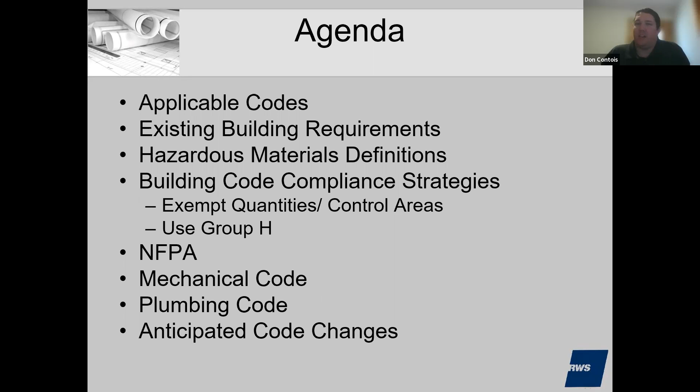And then we did add some slides on the 2021 IBC and NFPA 45. Some of the changes - there's one significant change for higher education in the 2021 IBC, but other than that, most of the changes were relatively detailed or minimal. But we will touch on that because that would be the basis of the 10th edition, and as John just explained, potentially will be in effect in about a little over a year.

So currently, the applicable codes that would apply to a project is obviously the Mass Building Code 780 CMR, 527 CMR 1, which is the Comprehensive Fire Safety Code, which adopts and amends NFPA 1, the Mass Plumbing Code, and then as part of the Building Code we adopt the International Building Code, the International Existing Building Code, the 2015 editions. The Fire Code is referenced by the Building Code specifically, as well as the Mechanical Code.

And then with the Fire Safety Code, 527 CMR 1, which adopts and amends NFPA 1 specifically, it also then references NFPA 30, 45, 55, 70 is the Electrical Code, and then NFPA 704, which is essentially those diamonds that you see on buildings and spaces that have hazardous materials that give the fire department an idea of what's in the room and how hazardous it is.

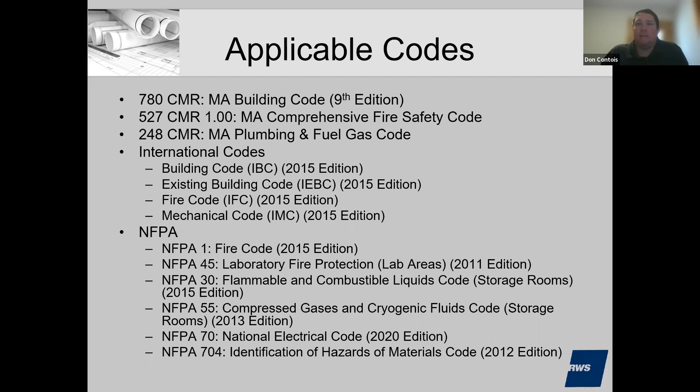So we have some slides on the existing building code and how it applies. This is somewhat general at the beginning. It would apply to any existing building project, but within 780 CMR Chapter 34, they delete the IBC Chapter 34 and replace it with an adoption of the International Existing Building Code. Chapter 34 then has the amendments to that code.

And within that, as part of the Mass amendments, any IEBC provisions generally related to electrical, plumbing, and accessibility are deleted, similar to the rest of the code, where it's replaced by the Mass-specific CMR, such as the Plumbing Code 248 CMR and the Accessibility Code, etc.

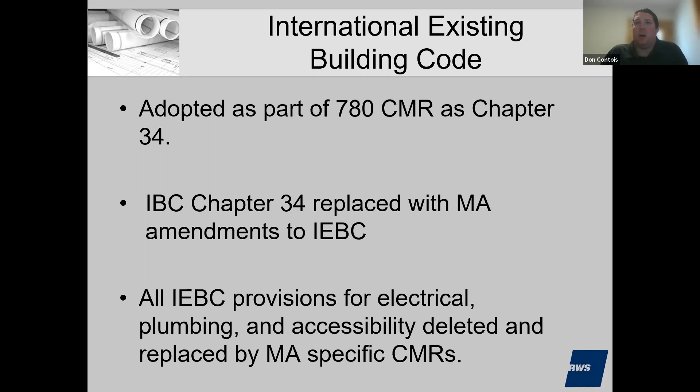So when you're working within an existing building, that's the place you really want to start, is to go to Chapter 34 in the IEBC, and that'll really dictate the scoping that applies to your project based on your renovation.

You certainly don't want to jump into essentially chapters 1 through 33 necessarily right away, unless you're directed to by the existing building code. We see that happen quite a bit, both on the building official side as well as the design side. We see a lot of attempts to either enforce or try to comply with the code for new construction, which may not be necessary based on the scope of the project.

So when you're working within the International Existing Building Code, it does give the designer three potential options of methods to comply with the code.

There's a prescriptive compliance method, which essentially says all your new work, your additions, alterations, or repairs have to comply with new construction, and then elements of the building that aren't altered would generally be allowed to remain. It's a very vague section. It doesn't provide much guidance or many exceptions, so we tend to not use the prescriptive compliance method, except for like a relatively new building where we know it's generally already compliant, and we would make the new construction comply no matter what. So that would be one time we would use that method.

The most common method we've seen used, and we generally use on our projects that we provide consulting on, is the work area method. And those requirements are much more specific, have a lot more different exceptions or different levels of compliance that get triggered for existing buildings.

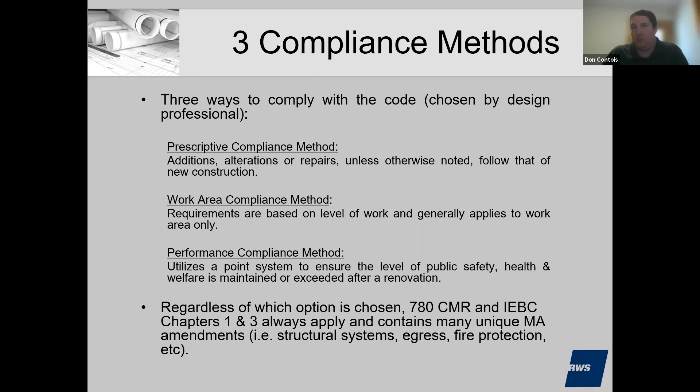That would potentially trigger either compliance or minimum levels of safety within the building, such as minimum lighting and ventilation, minimum egress requirements that a building official could cite at any point for an existing building. Obviously, once you do a renovation project and pull a permit, that may make the building official aware of some non-compliant issues in the existing building that would have to be brought into compliance. Again, those are generally clear-cut life safety or health safety issues such as poor ventilation, lack of proper egress—you only have one means of egress where you need two, or it's blocked, or something of that nature.

Certainly with a lab building, but any renovation project, you're required to submit a building investigation and evaluation report, generally previously referred to as a Chapter 34 report. I think I've heard it both ways a little bit more frequently now, but essentially it's a code report that's given as part of the permit submission, and it details and provides an evaluation of why your project meets the existing building code.

Obviously, it's much more important now that the IEBC is in effect, because it defines which method you chose to utilize to comply, and then it steps through that method to show how the building does comply with the existing building code. So it's a good tool for everybody. It obviously gives the design team the information they need to do the project, but it also gives the building official a lot of information, so they can understand why, for example, if you're not adding a sprinkler system, here's the code section that would have required it, and this is why we didn't reach the trigger, or some other things.

I think we found that most building departments at this point require some form of code report for existing buildings, and certainly for a lab related project, I would say most officials are going to look for that, just so they have some idea of: is it changing use to a high hazard? How are the chemicals being handled? Are we within control areas? Are you doing proper ventilation? Items like that. So I would certainly anticipate the building and fire officials looking for a report of this nature for any existing building that's dealing with labs and hazardous materials.

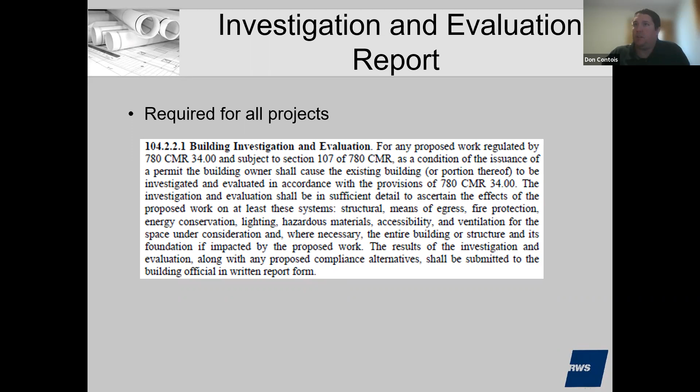So kind of jumping in, we've done a bunch of these existing building lab conversions or just renovations over the last couple of years. Some of the big things we've seen for existing lab buildings that are being renovated: obviously you have to maintain the same level of protection and same level of compliance as the building exists before you do the renovation.

And then when you're doing your new work, this is where that evaluation report comes in—you document, are we increasing the amount of chemical storage? Are we maintaining the control area separation, or was the building one big control area and we're staying below the maximum allowed quantities? Are we changing use to a use group H space, or do we have to add in a high hazard storage room, for example, because the tenant now needs more chemicals than they anticipated two or three years ago? So that's all important stuff that would be documented in that report.

And then the other thing to keep in mind is changes to operation. You weren't dispensing, and now you're dispensing within a room, or you had an open lab that didn't really use any flammable combustibles, and now they're using that for their operations. Do we need to worry about the electrical classification of the equipment within the space, because now we have a potential explosive environment, or do we need to increase ventilation because of the operations that are happening? So those are some of the big points we've seen questioned or needing to be addressed as part of a lab building renovation.

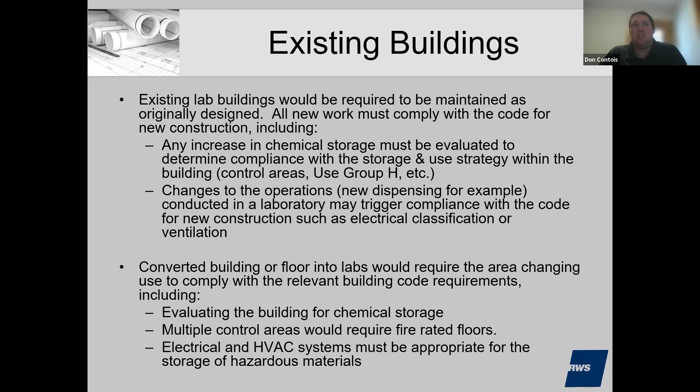How would we do control areas? What kind of tenants are you trying to attract? If it's more bio based and you don't need a lot of chemicals, then maybe it's not a big deal. But other buildings - how hard is it to retrofit fire rated floors, including the supporting construction? So those are all important things to keep in mind as you're looking at existing buildings, either renovating for labs or converting to lab space. And then the other big item, again with any existing building project, but it still applies to lab buildings,

is the Mass Architectural Access Board requirements for renovations of existing buildings. As I'm sure most of you are aware, the MAAB doesn't apply to office areas or employee-only areas. But it would still apply to, say, a multi-tenant building within the landlord space or the building owner space. So the main triggers: if you're spending over $100,000, you need an accessible entrance, toilet room, public phones if you have them - they've kind of gone out - and any public shared toilet rooms.

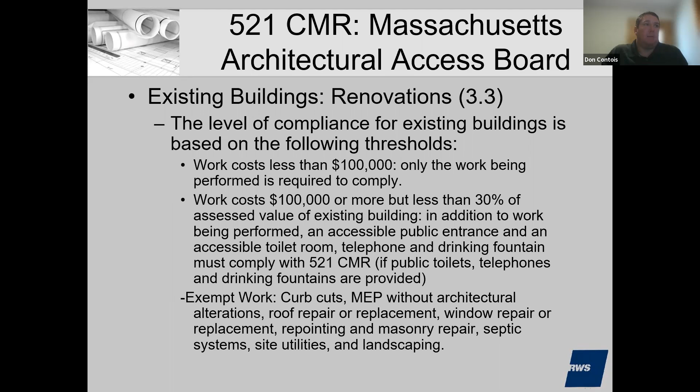And then the big trigger, obviously, if you're in an existing building in Massachusetts, is a 30% trigger, where the project cost exceeds 30% of the assessed building value. Now you've triggered full compliance throughout the building. And we've certainly reached that threshold on most of our lab conversion projects for an existing building, because obviously open office space doesn't work as lab space. So you're doing pretty significant renovations, and if you're doing the entire building, it's not hard to get over 30% of the assessed value in most of these places.

And where we've seen it affect it the most is because 521 CMR would not apply within the tenant space or the office space where it's employee only, but it would apply to the landlord or building owner spaces, such as the main lobby, all the entrances, your exit stairs - so that's handrails, nosings. So any of those common areas, the bathrooms - anything that's shared is essentially considered public space, even though it's only employees of the tenants that are in the building. Once it's shared by multiple tenants, it's landlord or building owner space, and that would fall into the jurisdiction of the Mass Access Board.

And the only other thing to keep in mind as you're doing work even in a building that's employee only, or generally not subject to 521 CMR, is the ADA still always applies as a federal standard. And that generally requires your new work to be accessible. So that would be any bathrooms within your tenant space, any common staff lounges, any kind of common space within the tenant space would have to be accessible if it's new. But individual work areas - your lab benches, your offices, your desks - those do not need to be accessible per the ADA.

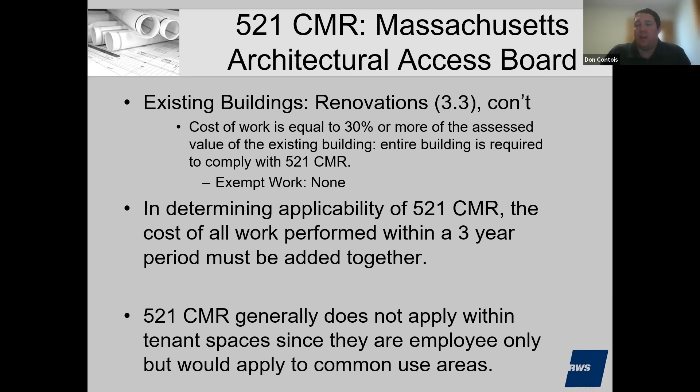So that's, again, kind of a brief overview of some of the stuff we've seen with existing building conversions. So now, I don't know if there are any questions on that. If not, we'll jump into the requirements generally for a lab building. So these would apply to any new lab building, or if you're doing work in an existing building or an existing lab building, these would apply to any areas where you're doing new work, renovating, or changing your chemicals or anything of that nature.

Generally, hazardous materials fall into two main categories: one's a fire safety or fire hazard, and the other is more of a health hazard. The IBC has two different tables split into those two different hazards.

A fire hazard would be the obvious flammable liquids, solids, combustible liquids, explosives, gases, etc. Then you get into more specialized ones: oxidizers, pyrophorics, unstable reactives, water reactives. For health concerns, there's corrosive, highly toxic, and toxic, and they all have different thresholds and different methods of determining classification, based on either flash point or items like that, or corrosive, highly toxic, LD50s, etc.

Those are all defined in Chapter 2 of the IBC in terms of determining what category that hazardous material, what that chemical is classified as. And as you'll see later in the presentation, those classifications will determine how much of that material you can have before you become a high hazard use within the building.

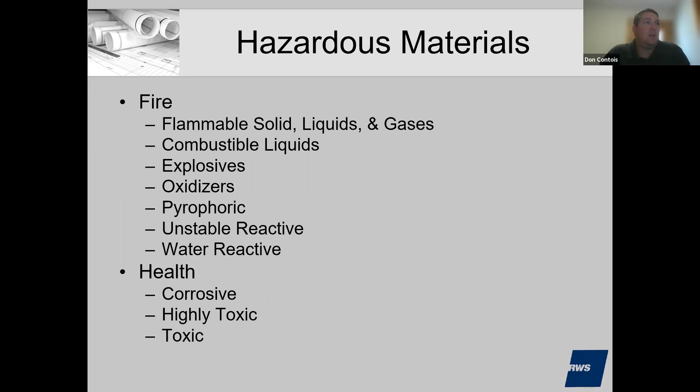As part of the definitions and classification of hazardous materials, in terms of day-to-day usage, or even when you're doing an evaluation of an existing building, the fire department is very interested in what's in these buildings, what's in the spaces, and how do we properly label them.

Both the ICC and NFPA require that some of these spaces or buildings or areas be essentially placarded or provided with signage that follows the NFPA 704 diamond requirements.

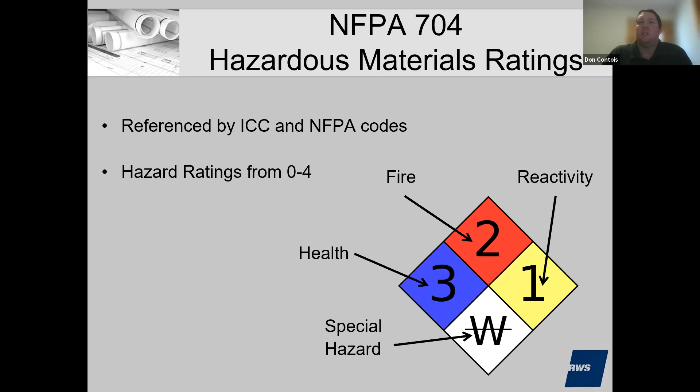As you can see here, a quarter of it is for health, fire, reactivity, and then kind of a special hazard. So within those diamonds, you would essentially put a number in. The higher the number, the more hazardous the item is.

For fire, a rating of 0 does not burn under normal conditions, and as it makes its way up, it gets all the way to a class 1A, highly flammable type material. For health hazard, again, 0 is no hazard, all the way to a health hazard of 4, which could cause death just by being exposed to the chemical.

Essentially the diamond doesn't give you specifically what the hazard is, or what the material is, or even some of these flash points or boiling points or anything of that value, but it gives you an idea of how dangerous the room or the area is. It's more of a guidance than necessarily a way that you would determine the use group classification or anything else with the building code.

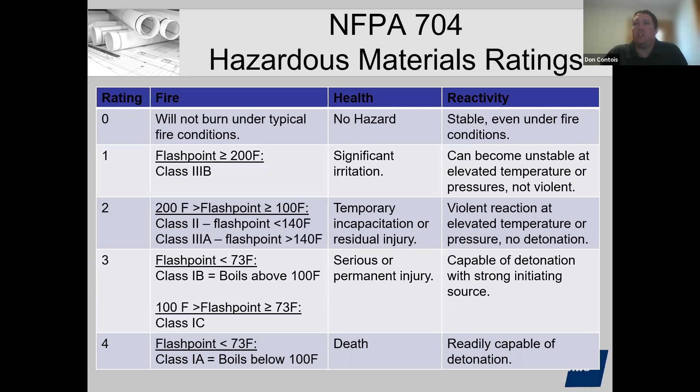When you're evaluating the building, or doing your design for building code compliance, there are three main categories that we typically see: labs, or chemical use type buildings for research purposes and teaching.

Use group B is business use. Essentially you're below the maximum allowed quantities, you're not a high hazard use group, and you may or may not have control areas depending upon the total quantity you're going to store in the building.

Use group B also includes colleges and universities, essentially above the 12th grade educational purposes - that would also be use group B. That's obviously the vast majority of laboratory buildings, and certainly you don't typically have use group H laboratory buildings. You may have portions of the building that are use group H, but most laboratory buildings you'll see are use group B, which is office space with lab space.

In most laboratory buildings, or quite a few anyway, we see a lot of them have a use group H area, or an H3 storage room, which would be flammable combustible liquids over the maximum allowed quantities. These would be limited to generally under 500 square feet, relatively small storage rooms or waste rooms, where you would exceed the control area limits for quantities, but you don't want to necessarily trigger the very stringent use group H requirements throughout your building. So you would do a separated use, and comply with the use group H requirements only in that area, or the egress serving that area.

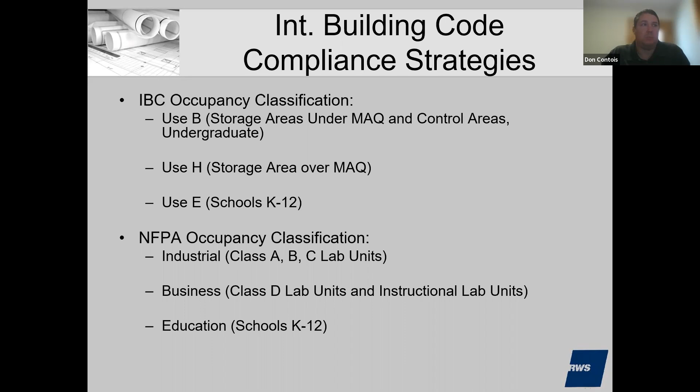Within the building code and NFPA 30, if you look at the Massachusetts amendments in 527 CMR, they amend NFPA 1 to try to match up these maximum allowed quantities between the International Building Code and NFPA 30.

The maximum allowed quantities are essentially a small amount, and the building would remain classified as the primary use group. So if it's just basic office space, it's use group B, and the entire building would be use group B.

If you have more than that small amount below the maximum allowed quantity throughout the building, you can divide your building up into control areas. Your building would still stay the primary use group, or use group B, but it would have to have 2-hour floors generally, and 1-hour or 2-hour walls depending on how tall the building is and where the control area is located. When you divide your building into these control areas, each control area is allowed a certain percentage of the maximum allowed quantity.

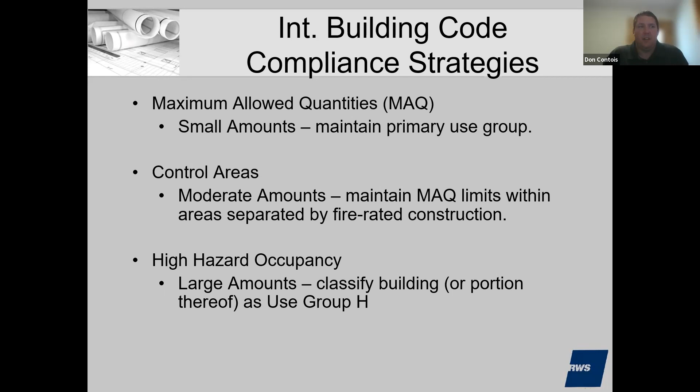If your building exceeds 100% throughout, when you get to the control areas you can have more of them, and each can have a certain amount based on its location. Where you exceed those maximum allowed quantities, you would have a high hazard, or use group H, occupancy. Typically you don't see a building classified that way because it's pretty stringent, and the construction type would have to be much more robust than if you just called it a business building. So normally we'd see a storage room or storage area carved out as use group H, and only that area would comply with the more stringent requirements.

When we talk about maximum allowed quantities, this table is just a partial excerpt from the IBC. The full table has a lot more material classifications, and there's another table for health hazard limits. For flammable liquids, even class 1 B and C, you're allowed up to 120 gallons, and you can increase that by 100% if the building's fully sprinklered. So these maximum allowed quantities are a decent amount depending on the type of chemical. Obviously the more hazardous, like an unstable reactive class 3 or class 2, at 50 gallons or 50 pounds, or 50 pounds in a sprinklered building, you can go up to 100.

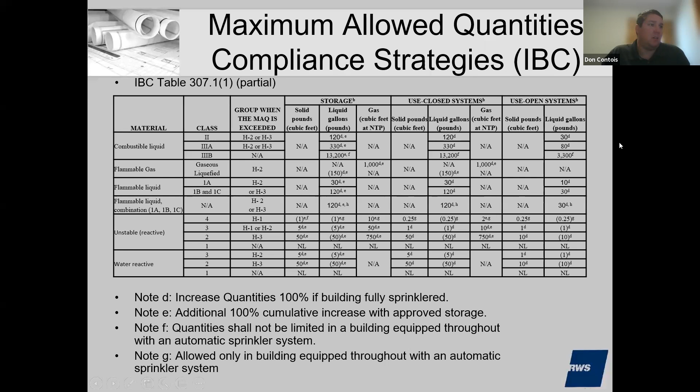So it does get limited based on the classification. As you'll see in the next slide on control areas, those percentages only give you a portion of those quantities as you go up in the building, so those previous maximum allowed quantities you can essentially divide.

Here's an example of what the code allows for maximum allowed quantities and control areas within your building. For a 5-story building, all your floors would need to be 2-hour rated. You could divide it up into separate control areas, and within each floor, for example floor 1, you can have 4 control areas each with 100%. So you can see how those maximum allowed quantities can add up. Even if it's 100 gallons of class 1, with 4 different control areas, you could put that 100 gallons in each one. Then you could put 75 gallons in each of the floor 2 control areas. You can see how a lab building can have quite a bit of hazardous materials without becoming a use group H occupancy.

As you can see in the 4th column, it talks about the wall ratings. Up to the 3rd floor, you can have 1-hour separations for your walls. Once you're on the 4th floor and above, you need 2-hour fire barriers to separate control areas on that floor. If you're doing a lab building, you want to keep the chemicals and chemistry-heavy lab tenants or lab spaces lower in the building, because the maximum allowed quantity percentages are much higher there.

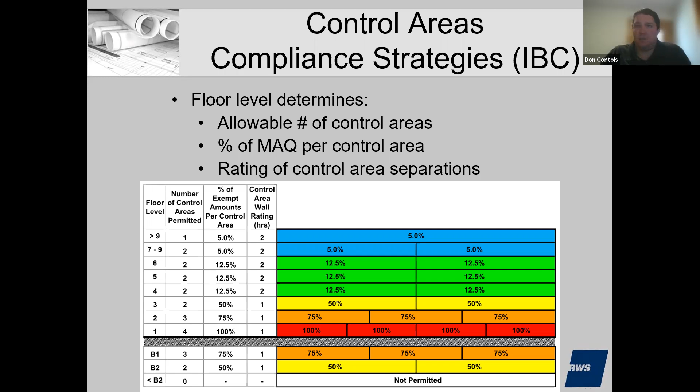As you work up through the building, if you're only allowed 100 gallons total, for example, you'd only be allowed 5 gallons on the 9th floor. So you're pretty limited once you get up in the building. But the lower levels can have quite a bit of materials and quantity.

This is one of the more critical things to investigate as you're evaluating whether it's feasible to convert your building to a lab building. The general requirement is you need 2-hour rated floors to have multiple control areas within the building. The only exception is essentially a 1-hour fire rated structure, only 3 stories in height, that's fully sprinklered—the 1-hour structure would be sufficient. Other than that, you'd need the 2-hour floors.

On a couple projects where the existing building didn't have fire rated floors, and it would be cost prohibitive and difficult to retrofit them, we essentially created boxes. In one project, we did it in the basement, so it's on grade and we don't have to worry about rating the floors. We just do a 2-hour cover cap or ceiling, supported by 2-hour perimeter walls around the control area. We didn't have to touch the existing building construction at all—since the walls were supporting the 2-hour fire rated horizontal assembly, the new walls and assembly were fire rated, and we could put a control area on the lower level without affecting the whole building.

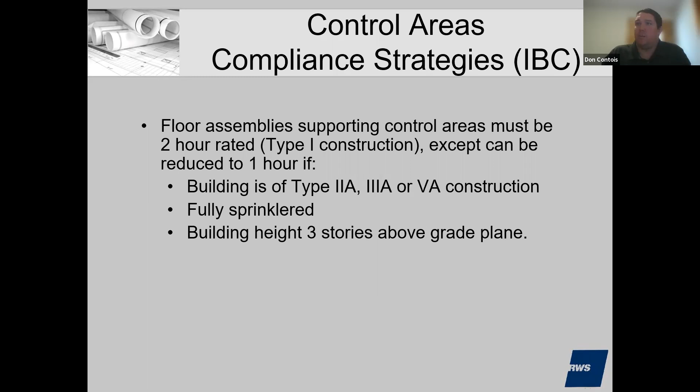So again, back to the liquid storage room. What we find is that most of these use group H spaces, or these large storage rooms of larger quantities, would be under 500 square feet. That way you can have a 2-hour rating, and that essentially corresponds and meets the IBC. So in most cases we find that our use group H, or our high hazard type uses, are H3, which are flammable liquids, systems that are under 15 psi.

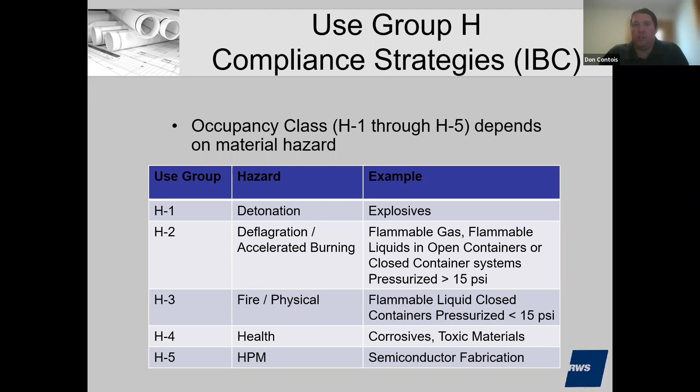So essentially you don't have pressurized hazardous materials. And again, there are exceptions in the building code that make that 500 square feet pretty important, because the building code has requirements that these rooms be located in certain portions of the building, or away from lot lines, or along the perimeter of the building. So it's important to know, one, what use group classification are you in, and then how big is that room going to be.

So for example, if you have a high hazard room, usually it's a use group B building. I mean, you could have it in a larger use group E school system, but normally you find it in use group B. So H3 actually only requires a 1-hour fire rated separation. H2 is the pressurized chemical. So if you had a system where say you had a storage tank of a flammable liquid and it was piped and pumped into an adjacent lab area at a higher pressure, that potentially would trigger use group H2, which would be a 2-hour room. But even with that, you're most likely need to be 2 hours anyway if you're over 150 square feet per NFPA 30. So you've got to work together between the two codes.

I would say hazardous materials are one of the more frustrating parts of the codes, because there are two, three, maybe even four or five different codes that all impact how you design it. Being the building code, obviously, the International Fire Code, which we're referenced by the building code. Then you have NFPA 1, which NFPA 30 and 45 are adopted, depending on how you're storing your chemicals and how you divide up your building. And then obviously there's the mechanical code that kicks in as well. So it does get quite complicated, and you have to obviously meet all the codes.

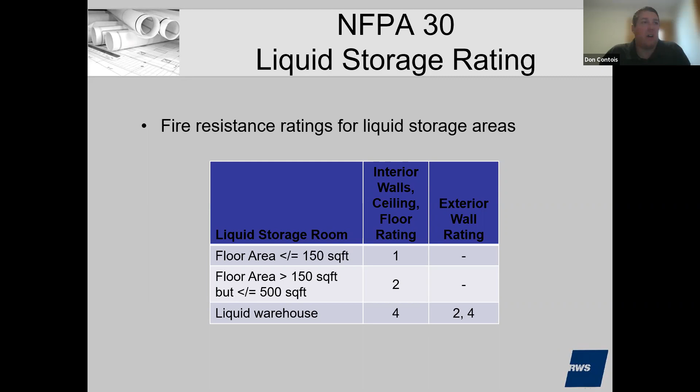So as I was saying, depending on your use group classification in the building code, there are minimum separation distances for walls that enclose that occupancy. For H3, there is no requirement, again, which is the more common use group classification for these type of hazardous or chemical storage rooms in a building that has control areas. If you do have that use group H2, where it's a pressurized system or flammable gases, if the aggregate area exceeds 1,000 square feet, now we're looking at a 4-hour rated room.

You have to be 30 feet from a lot line, which again, a lot of these buildings are on larger parcels, but obviously in downtown Boston, you see plenty of these lab buildings down in the seaport that are high-rise lab buildings that essentially take up the full lot, or may not have the full 30 feet.

And then the other criteria, and this is where the 500 square feet also comes in pretty importantly, is if you exceed that 500 square feet, you also need to be along the perimeter of the building. So 25% of your room needs to be along, or that use needs to be along the perimeter of the building.

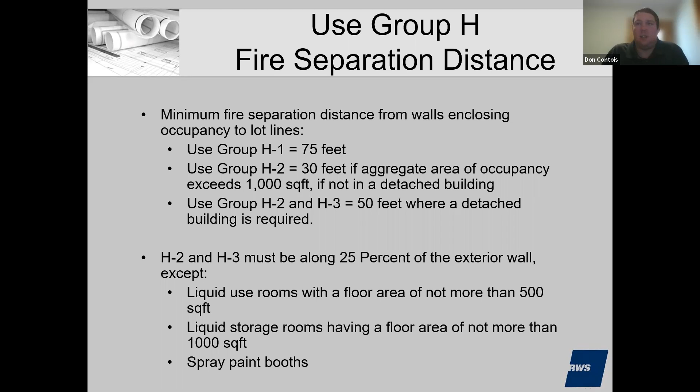So kind of now jumping more into specific systems and means of protection within these rooms. The code requires... go ahead. Don, yes, one more question. Sure. On those storage rooms, you didn't make any mention of the possibility of use of blowout panels.

Yeah, I have a couple slides on the explosion control later on. Yeah, so that's also part of the reason for it to be on the perimeter, but there are other systems out there that you can use to essentially prevent the explosion, or other means. So when you have it internal to the building, it's only certain chemicals and certain hazardous materials that actually require the explosion control. So that's why, again, it being located on the perimeter of the building is not as important necessarily. But we'll touch on the explosion in a little bit.

So as part of the leak detection requirements, a lot of these requirements that have the enhanced protection are generally required in these use group H or liquid storage room spaces. So when you look at it, a lot of them will say where the storage is over the maximum allowed quantities, or where the containers are over the maximum allowed quantities. So if you're below the maximum allowed quantities, most of these requirements don't apply, which is again why a lot of these lab buildings are using control areas or trying to limit the quantities.

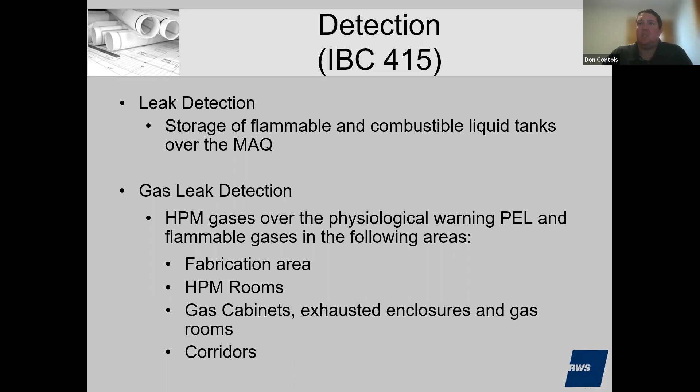So that's kind of the building code requirements. And then there's the international fire code requirements that require leak detection, again where you have health hazards - class 3 or 4 flammability, class 4 - the more higher hazard materials. The international fire code requires some kind of leak detection where you have pressurized systems. And underground flammable combustible liquid storage tanks would have to have some leak detection, generally for environmental purposes rather than actual fire hazard purposes.

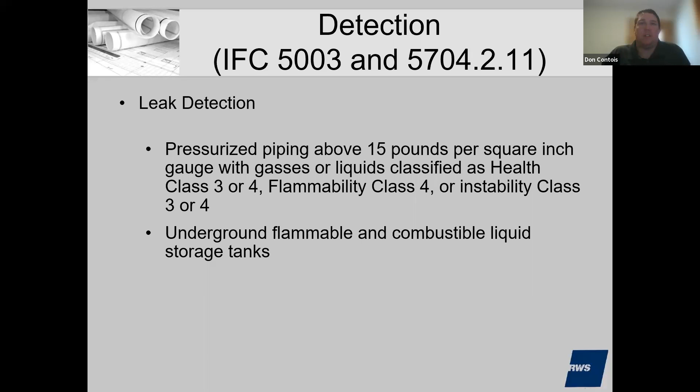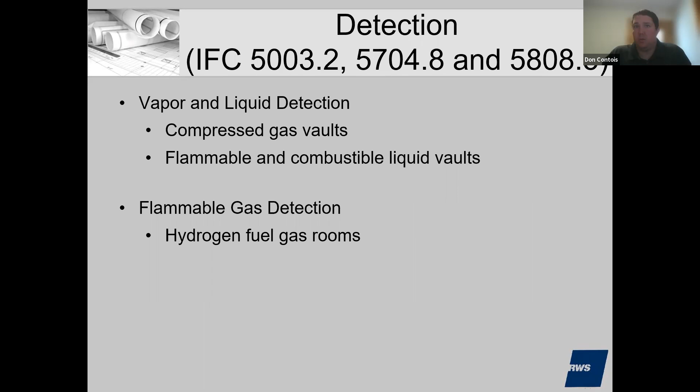And that again corresponds to, or is also addressed in, various NFPA standards. So we have compressed gas vaults, flammable combustible liquid vaults - those are again more of those 4-hour type high hazard spaces. You need certain vapor and liquid detection. And then hydrogen fuel gas rooms, you would need flammable gas detection. Some other gas, toxic gases over the MAQ in cabinets, exhausted enclosures, toxic and highly toxic gases over the MAQ, and then corrosives in gas cabinets. So again, a lot of when you're over the MAQs, there are very specific requirements for detection.

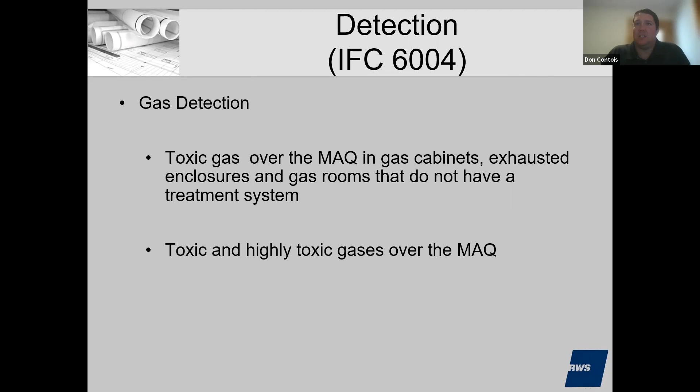So again, that's NFPA 1 and NFPA 55. As you can see, the IFC has their own toxic requirements, and NFPA 1 has corrosive gas requirements. So as you're going through, it's very important to know which code you're falling under.

Are we above the maximum allowed quantities? Part of the hardest part of this, especially when you're doing the design of kind of the shell core before you have the tenants, is how do you determine when you need some of these systems, because they are so dependent on the type and quantity of materials.

If you're trying to design a lab building to handle anything, you could potentially be adding in a lot of different systems that you may not need once the tenants are found. So it becomes challenging if you're not designing the building specifically for a certain tenant who has a good knowledge of what chemicals and how many chemicals are going into your building.

Generally, we take the approach of doing control areas. We'll define how many control areas per floor, but we don't assume any use group H spaces. But because they only need to be 1 or 2 hour rated, they're pretty easy to retrofit into a building that's already designed for control areas, since you have the fire rated structure, systems, and floors. So normally for shell core, or the start of a lab building, or even a conversion, that's the general concept we take.

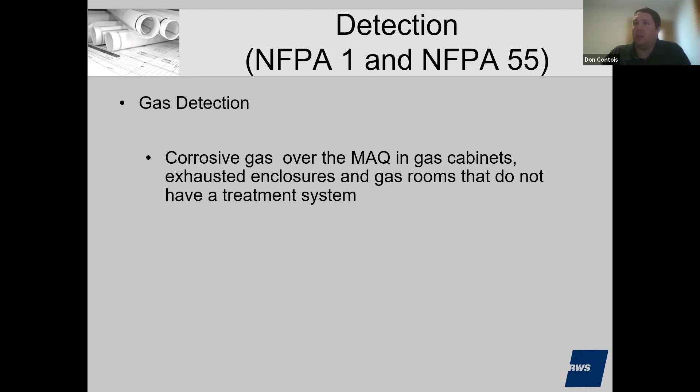Hey Don, before you move on, we had a question in the chat. How do you protect the means, for example the pipes, to move the hazardous liquids to other rooms or outside of the building? Is there any guidance on protecting the actual transmission lines?

Honestly, there really isn't. That's kind of a challenge. Normally the pipes have such a minimal amount, so you would protect the rooms, and then just fire stop the penetrations, with everything outside. So say you have that liquid storage room, or a storage room that's a separate control area, 1 or 2 hours separated from the rest of the building. You fire stop that penetration, and then you kind of start over. The pipes usually aren't considered the main hazard.

But obviously if those pipes are pressurized in those rooms, this is where it kind of gets into open use versus closed use and the quantities. Generally the room where the actual material is stored gets most of the protection, and you pipe it into the control areas. There are generally allowances or exceptions for the piping portion of the system.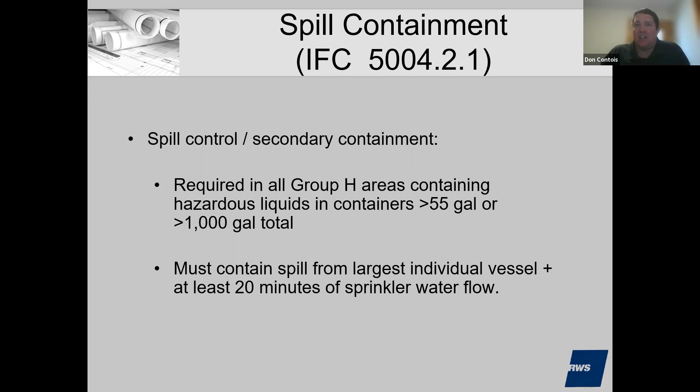This is again where the codes have different requirements based on the type of material. For use group H, containing flammable and combustible liquids, if a single container is 55 gallons or more, or you have 1,000 gallons total, you trigger this secondary spill containment requirement. NFPA 30 has its own requirement, and that's when an individual container exceeds 10 gallons.

So this is a much more stringent requirement and would also be applicable. The only time it wouldn't apply is if you have a class 3B liquid, which is generally not limited in quantity anyway once you're in a sprinkler building. So class 3B would never trigger your high hazard use, but it's important to make sure you're looking at every code and all the applicable codes, because they have different thresholds for a lot of these systems.

So again, you have to have a drainage system or some other way to control the sprinkler water spread. In some cases, we're working on an existing building right now where they want to make their use group H space larger. To do that, they had a foam system in there, and we're going to just expand the foam system to protect the space so they don't necessarily have to be concerned with this spill containment requirement of NFPA 30.

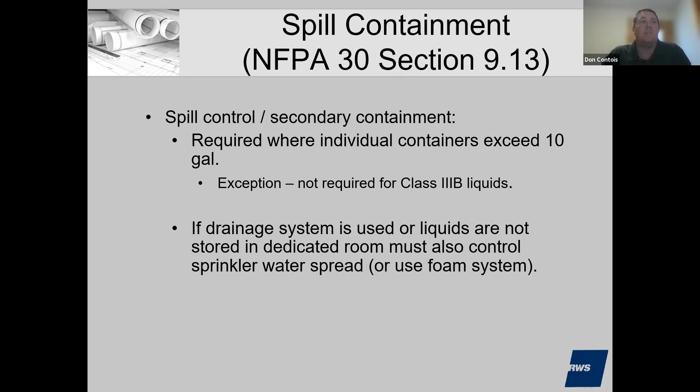With the different requirements, there are different methods of compliance. For spill containment, you could do a foam system, which essentially coats the top of the flammable or combustible liquid and smothers and prevents the fire from even starting. Another system, where again you can have multiple different means of protecting, is explosion control.

It's required in use group H areas, again over the MAQ, where an explosive environment can occur because of the hazardous materials dispensed or being used. Generally, it can consist of one of three options. One would be explosion venting, so that would be the blowout panel. Obviously your room or area would have to be on the exterior of the building.

The explosion prevention system is more of a detection system that would detect a fire and essentially suppress it before it actually becomes explosive, with enhanced ventilation and enhanced sensors detecting levels of explosiveness in the LELs or the vapors. And then damage limiting construction is essentially designing your room or space to contain the explosion, so that would be a very structurally strengthened and strong type of space.

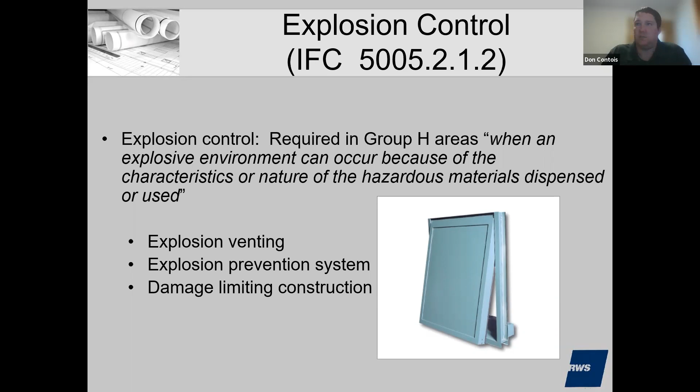The explosion venting or prevention system is required when you store above the exempt limits. For flammable liquids, for example, class 1A would require it, and class 1B is only required when you have open use or dispensing of that material. A class 1C, class 2, or anything of a lower flammable or combustible liquid would not require explosion venting. So again, it's very specific chemicals.

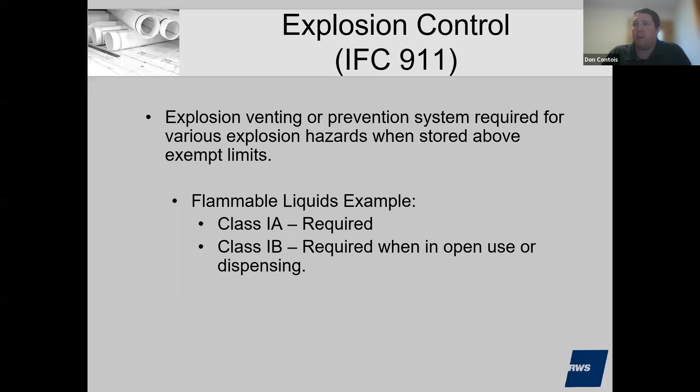This is where it's important to understand what's being stored in the room and how it's being used to determine what systems are needed. It's very rare that we find explosion venting and explosion control required in most lab buildings—essentially you can operationally store and use chemicals in a manner that doesn't trigger compliance with this.

But similar to before, NFPA 30 kicks in again when you're over the maximum allowed quantities, and that would actually require it if you had a 1 gallon container of class 1A or an unstable flammable liquid storage room. So NFPA 30 kicks in with slightly different thresholds.

Interestingly enough, and I've never really understood this, NFPA 30 says liquid storage rooms totally enclosed within a building are exempt from this requirement, because obviously you can't do explosion venting if it's on the inside of the building—but they don't require you to put it on the outside. So if you put it on the inside, you've met an exemption, not because you are safer, just because there's no physical way of doing it, which was always kind of perplexing to me.

But through the combination of the building code and NFPA 30 and everything else, you would kind of get there if you reach some of these thresholds over the maximum allowed quantities anyway.

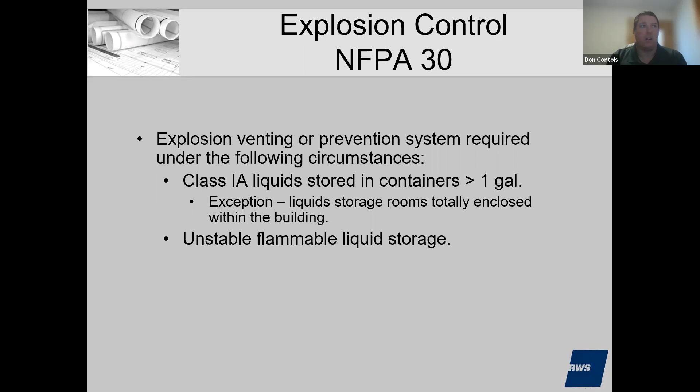In a lab building, NFPA 1 references and adopts NFPA 45, which is a very similar concept to the control area concept, but it does have different requirements and limitations than what the IBC has. It's similar in that you can divide your building up into separate fire areas. In this case, they're called laboratory units instead of control areas.

In the building code, there's no area limitation for your lab units, and there's no different classifications for control areas. It's either you're below the maximum allowed quantities or you're not. So you're either control area or you're use group H.

Under NFPA 45, they have different laboratory units, which is based on the amount of chemicals as well as the density that's being stored within the space. Laboratory unit A would have the highest hazard, all the way down to laboratory unit D, which has the least amount of chemicals and the least dense chemicals.

The other difference between NFPA 45 and the building code is they don't limit the number of lab units. So you can have many more lab units than control areas, as long as you meet the size limits and the fire rated separations.

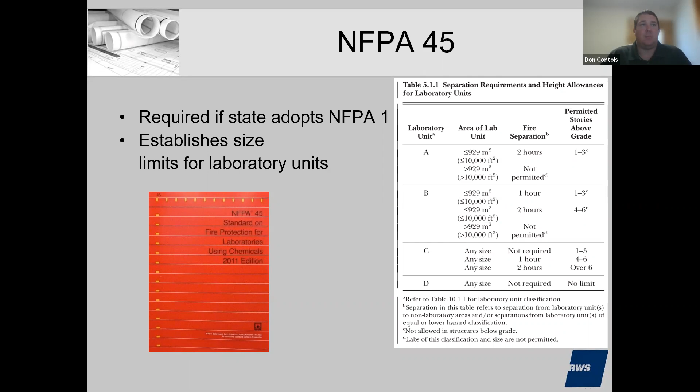These quantities differ from the building code quantities in terms of the overall amount you can have. So in cases where the laboratory unit quantity is less than the building code quantity, you could put multiple lab units within your control area and meet both codes in that manner.

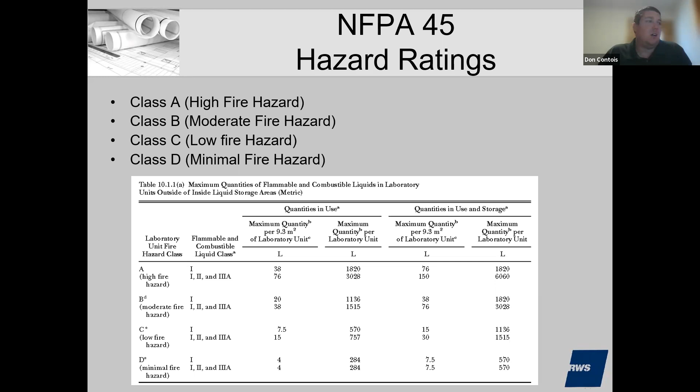Some of the further limitations of NFPA 45: for educational laboratories, K through 12, they only allow certain classifications, essentially Class D or Class C, up to 50% of the allowed Class C quantities. The educational labs have to be 1 hour separated from the non-lab portions of the school.

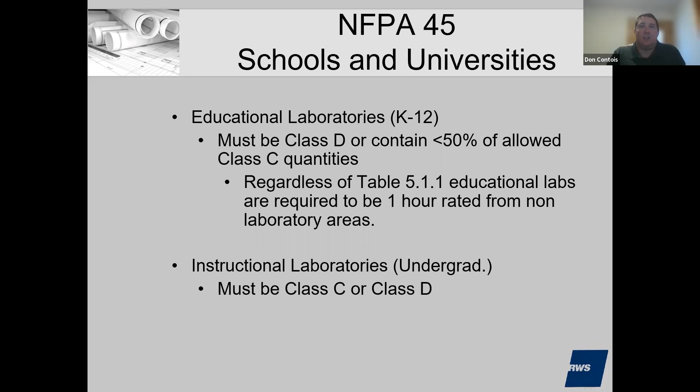For colleges, they can only be Class C or D. You can't have the higher hazard Class B or A lab units within those types because the users aren't as familiar with it and don't have as much experience dealing with some of these chemicals. So they try to limit the potential hazards that could be created.

Some of the other differences between 45 and the IBC: 45 references NFPA 101. In general, Mass doesn't require compliance with NFPA 101 because the building code covers all the means of egress requirements specifically that are covered by 101. So in general, the egress requirements would still follow the building code for the most part, but there is the reference, and we have seen some complications caused by that.

Specifically in 45, there are single exit requirements, which we've certainly seen enforced by the fire officials. It does limit the maximum size of some of these lab units that can have a single means of egress out of the unit. So you might find that you meet the building code - under 50 people, 100-foot travel distance - but you may not meet NFPA 45.

We've had it go both ways. We've had discussions with building and fire officials, and said the intent of the Mass code and the fire code is not to contradict the building code in terms of means of egress - that the building code is really supposed to dictate that. But there have been a few instances where the building and fire officials have enforced the more stringent NFPA 45 requirements. In my opinion, the building code is supposed to supersede the fire code in terms of building construction requirements, but that has been a jurisdictional battle for probably decades at this point in terms of what code supersedes what and who has authority over certain aspects of the code.

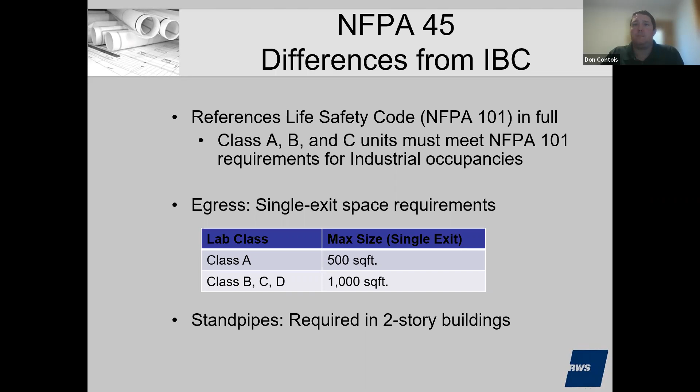Another system that's also can become confusing and has caused issues in the past is hazardous exhaust, and how do you exhaust these lab spaces and fume hoods and items of that nature.

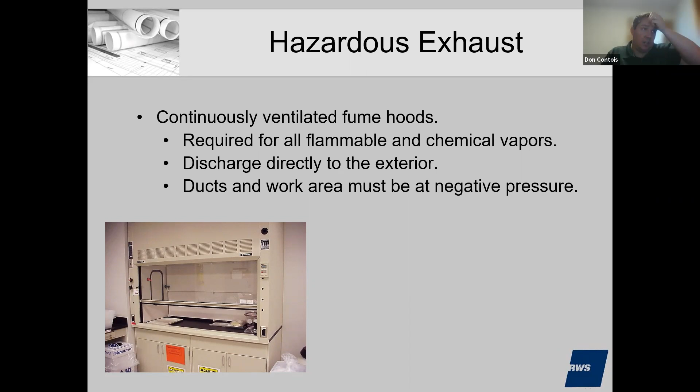Hazardous exhaust is essentially required anywhere you could exceed some LELs or some other criteria without the presence of the exhaust system.

For hazardous exhaust, the mechanical exhaust of high concentrations of dust or hazardous vapors have to comply with 510. And within 510, there are a lot of exceptions for laboratory buildings. That's extremely important because if you don't meet the laboratory requirements, you certainly would trigger additional systems or protections that aren't normally provided. So this allowance is very important.

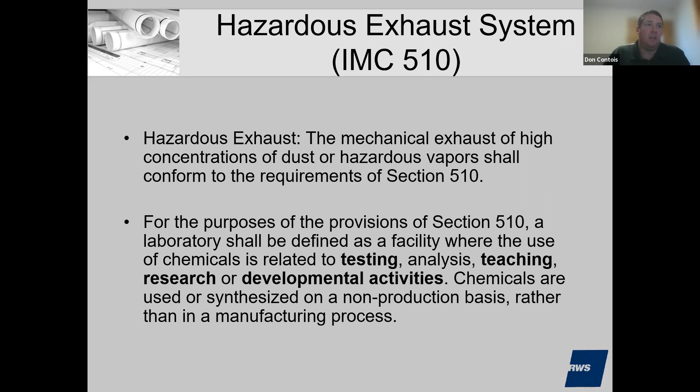I think most people are pretty familiar with the laboratory classifications in terms of hazardous exhaust, but it does result in a lot of important exceptions.

A hazardous exhaust system is required wherever the absence of the system would require you to have flammable vapors over 25% of the lower flammable limit, a health hazard concentration of 1% of the median lethal concentration, or a health hazard rating of 4.

Essentially what this is saying is, if you don't have that system, would you create a hazardous condition? That system by default must be exhausting something that is of a higher hazard that needs to be addressed specifically per the code. Otherwise it would be diluted to the point, without the exhaust system, that it's not truly a hazard.

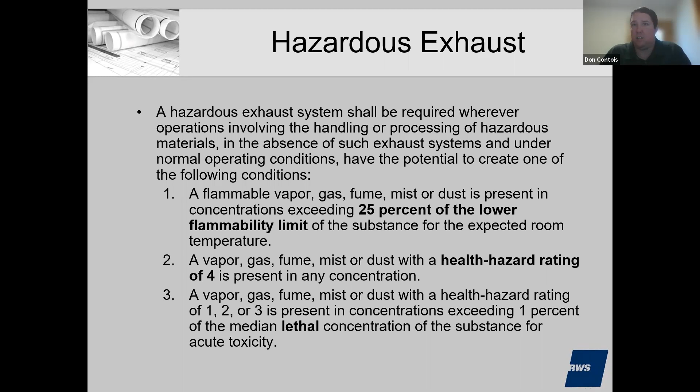Hazardous exhaust lab requirements - and again, it's important to note the lab requirements because it's different if this was like a manufacturing facility, or a facility that was either producing chemicals or using chemicals to produce items, or a manufacturing process. That's treated completely different than a lab building.

In all buildings, the code requires that the hazardous exhaust system be independent of other exhaust systems. Essentially your fume hood exhaust cannot manifold together with the room exhaust unless the room exhaust is also considered hazardous exhaust. So if your general ventilation system serves the office area and other spaces, you couldn't manifold or connect your fume hood exhaust to that exhaust system.

Your hazardous exhaust system also has to be in its own shaft, independent of these other systems, unless you do essentially a subduct system, which is all the ductwork under negative pressure. It's a continuously operating fan, and the fan's on emergency power.

You can put multiple ducts in the same shaft, but your hazardous exhaust ductwork still needs to be completely separate from all your other general ductwork and general ventilation ductwork. And then that hazardous exhaust would be constantly ventilated, and because you can't have dampers, you have to subduct.

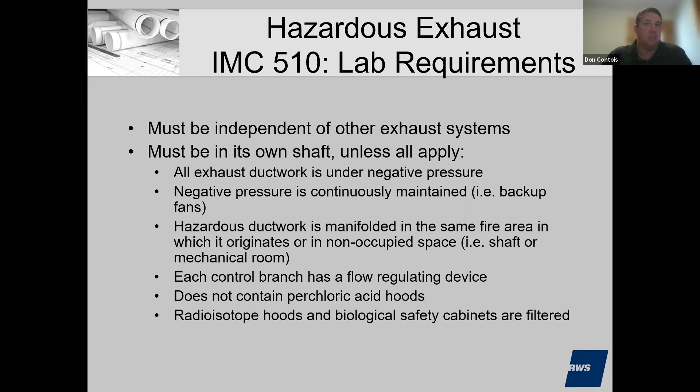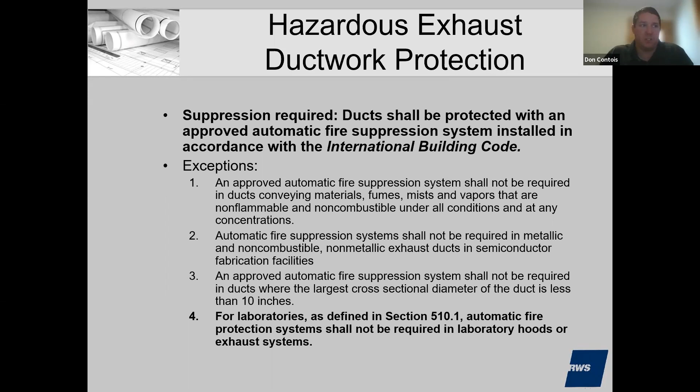One of the more important exemptions, and this is where the laboratory classification matters, is you do not need a suppression system - sprinklers - within the ductwork. For laboratories, this isn't required. Again, that's where the laboratory designation versus a manufacturing facility, for example, is very important with this type of system.

As I just noted, you can't have fire and smoke dampers within that exhaust system, because the whole point is to exhaust that, and you wouldn't want those closing or shutting under smoke or fire conditions. You actually want to try to exhaust that and keep the place safe by exhausting the smoke and whatnot.

So what happens is, say you don't have a shaft in every control area, or for some reason you have other fire rated walls dividing your floor - once that ductwork penetrates that fire rated wall, you either need to wrap the ductwork in a rated enclosure, or the alternative is to actually provide that interior duct fire suppression system.

Normally we see the ductwork enclosed in some kind of fire rated assembly, or, if approved by the building official, duct wrap or some other means of creating that fire rated separation, maintaining it from the wall penetration all the way till you reach your shaft. Once you enter the shaft, you can combine your ductwork into that common exhaust riser that serves your other hazardous exhaust systems throughout the building.

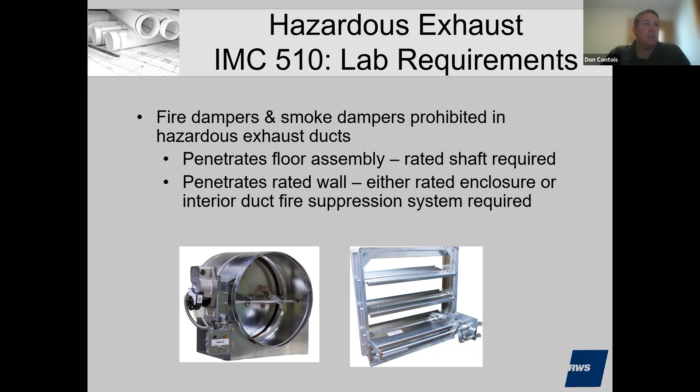Electrical systems. Depending on the materials you're using in the space, whether or not you have an explosive environment while you're working in it, or whether it would only happen under an accident, you need to worry about your electrical systems and the classification for them.

Within NFPA 30, and I believe NFPA 497, there are different requirements for classification. But within NFPA 70 itself, it's got a kind of vague description and definition for when you need to classify your system. Essentially, a Class 1 Division 1 requirement applies where vapors exist under normal conditions, so you'll regularly have an explosive environment, and you need fully explosion-proof electrical equipment.

Where you have flammable or combustible liquids that are normally contained, or it's an exhausted enclosure like a fume hood, you have a Class 1 Division 2, which still requires the electrical equipment to be listed and tested, but it's potentially more forgiving. Generally this would be along the floor, within 3 feet of the floor within the space. You need to look at your electrical requirements based on the likelihood of having explosive vapors, or even under an accident.

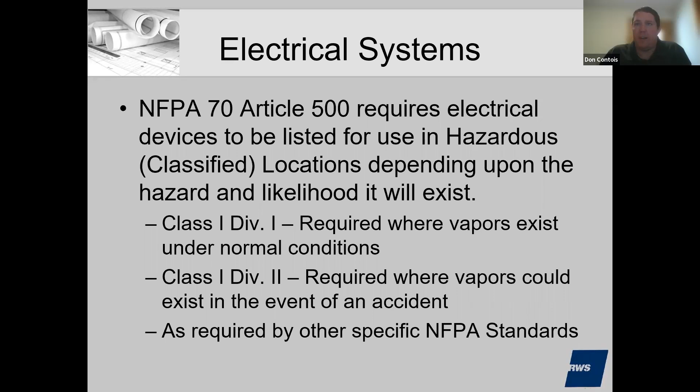In a lot of cases, we would see a process engineer or some other engineer who is more familiar with the process happening in the space, or how the chemicals are being used, helps dictate what hazards exist in an accidental release, and where we'd have to worry about these electrically classified areas.

Your hazardous waste piping. Under the Mass Plumbing Code, anything that's chemical waste, nuclear waste, deionized liquids, acids, solvents, is essentially considered hazardous waste.

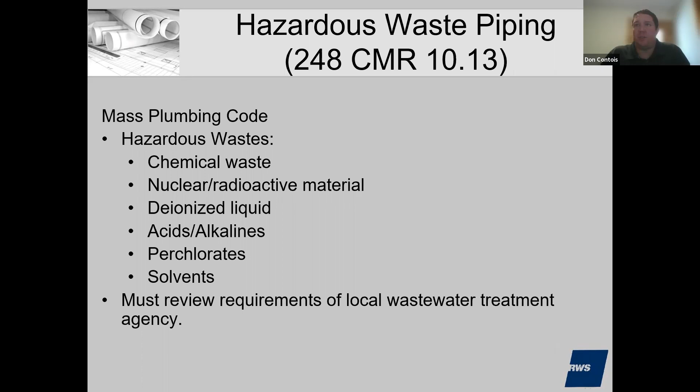Whether or not, and essentially how you treat these, how you drain these, how you have your sinks piped, will really depend on the local wastewater treatment requirements, whether you can do a neutralization system, or if you have to actually just store it in a tank and have it pumped out by a hazardous materials company.

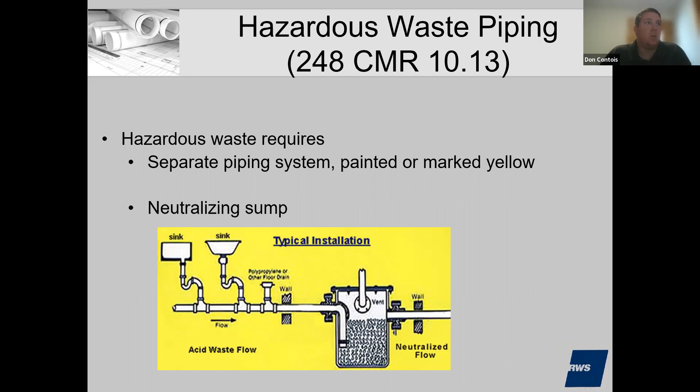It should be, or has to be, a separate piping system, painted or marked yellow. Normally it would go through a neutralizing sump, and the neutralized flow would then be sent to the waste system. Again, you have to deal with the local wastewater company and meet their regulations, which will vary based on the local jurisdiction.

The last couple items are the emergency wash and eye wash systems and shower requirements. Under the Mass Plumbing Code and Fire Code, it's required in all labs, schools, colleges where there are corrosive or flammable liquids handled, chemicals are stored, and it has to have a shower, a handheld or body face wash, and a drench hose, or one or more.

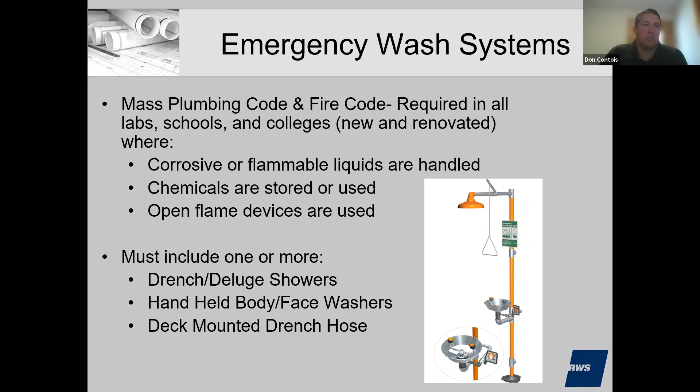Normally we would see a shower with the eye wash below, and that covers both the Mass codes as well as the OSHA codes.

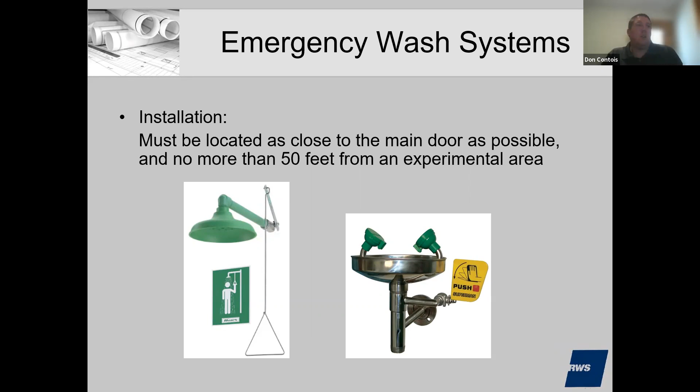Generally, they should be located as close to the main door as possible and not more than 50 feet from an experimental area. That 50 feet essentially comes from the ANSI standards and the requirement that you be within 10 seconds travel to one of these systems.

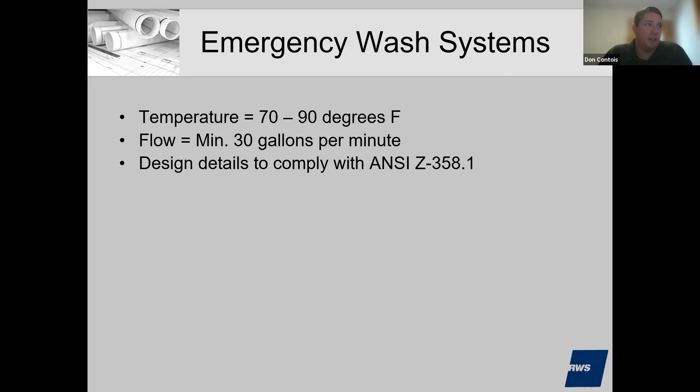The system must have 70 to 90 degree water at all times, so it has to be on a recirculation loop to maintain temperature, so you're not getting blasted with cold water in your eye. It needs 30 gallons per minute, and the design details should comply with the ANSI standard for these systems.

OSHA essentially just requires you have an eye wash and shower where you could have corrosive materials, and again you have to meet the 10-second travel, which is about 50 to 55 feet.

If the material you're dealing with is corrosive, OSHA and the ANSI standard do not allow you to pass through a door. A door is considered an obstruction when dealing with corrosives, so you'd have to have it in each lab area before you pass through the main door.

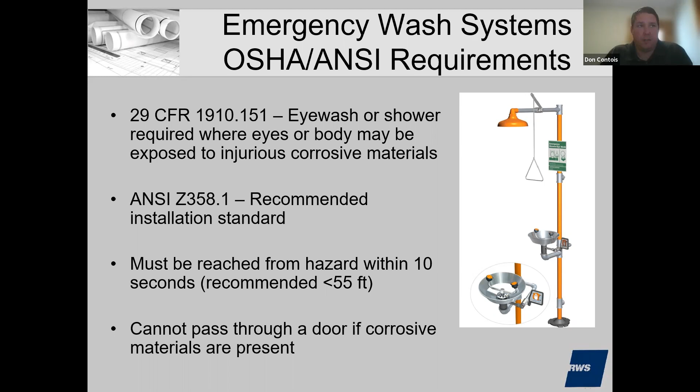And then the final item is just a requirement throughout all buildings that you generally have to have fire extinguishers, but within a lab, they have to be within 30 to 50 feet, depending on the size of the extinguisher. And the Mass code, if you're working in an existing lab and it doesn't have those emergency wash systems, would require one of those fire blankets within the space in lieu of the emergency wash system. But for a new lab building, you would provide the emergency wash system.

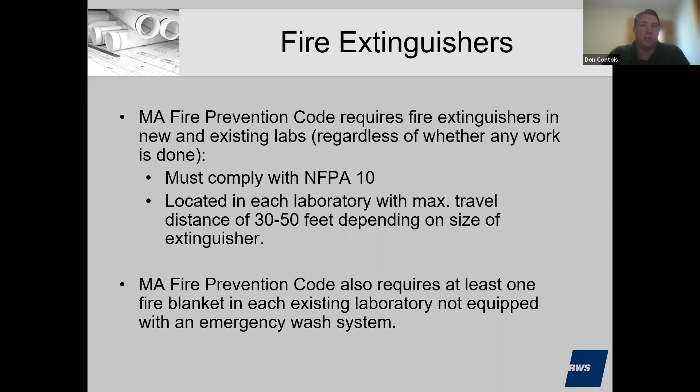And then we have a few slides just quickly on the NFPA, the 2021 IBC code changes, and some new code changes that can be anticipated as part of the 10th edition.

So for anybody who works in higher education lab buildings, use group B, college and university, they actually added a whole new section on higher education labs, which results in allowing you to have a larger amount of chemicals within the building. So within a higher ed building, you can have what they call lab suites. Within the lab suite, you can still have 100% of the maximum allowed quantity, say on floors 1 and 2. You can actually have 6 lab suites versus the 4 control areas, and you still need the 1 hour separation.

So essentially, in looking through section 428, there really aren't any additional safety requirements for the most part that differ from a general use group B lab building, but I think the concept is it's more highly supervised, and normally the densities aren't there, and it's more for teaching. So you can have a little bit larger square footages. You have more labs than necessarily like a lab building. They actually added this in 2018 as the official code change, but in the 2021 it remained in the IBC. So for those who work in college and university, this is a little bit more lenient and would potentially allow you to maintain a use group B classification with a little larger quantities of liquids.

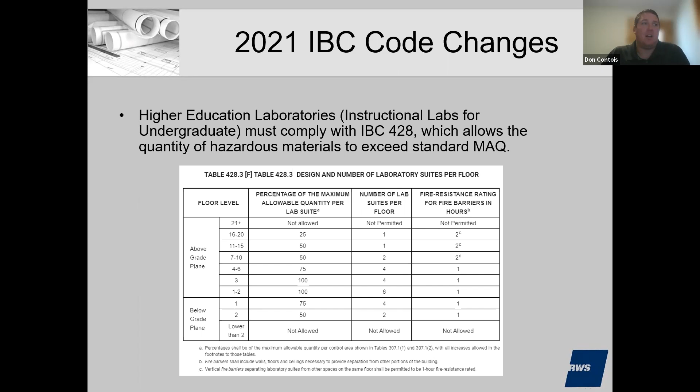So NFPA 45 actually will be updated to the 2019 edition as well. And what they removed here, similar to the control area concept, is they got rid of the square footage limits. So it'll be a similar concept to the control area concept in terms of the quantities you can have, the required separations, and the location above grade, but there is no square footage limit anymore. So it'll really be driven by the quantity of chemicals within the area.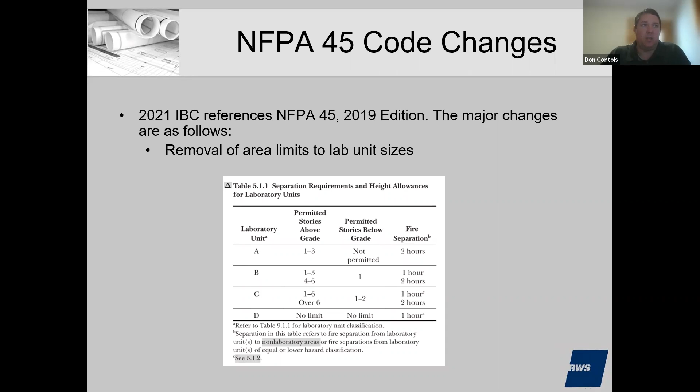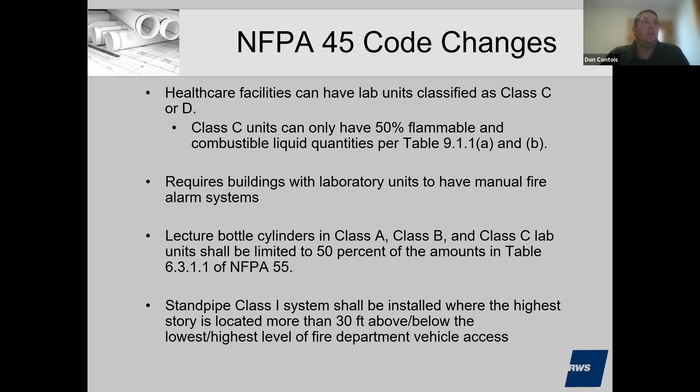And then a few specific changes for healthcare facilities. So again, a lab or chemical labs located in a hospital has specific limitations in terms of class C or D. So again, the lower hazard laboratories would be required. You have to have manual fire alarm systems now - again, most buildings would already have that anyway. Lecture bottle cylinders would be limited. And then again, a class 1 standpipe system - they changed it to be 30 feet, not necessarily 2-story buildings. So that would actually be a change that would bring it into coordination, or match up with the IBC requirement.

And then one of the bigger changes that will have a pretty big impact is the IMC actually removed a section that's in the 2015 that eliminates the requirement for your hazardous exhaust system to be independent of other types of exhaust systems. So this is actually more consistent with recommendations by lab consultants. And what it allows is essentially your general lab exhaust, your room exhaust, can now be manifolded with your fume hood exhaust and then brought to your hazardous exhaust duct riser, rather than having to run 2 different ducts out of your control area.

This has been approved in Mass in a few different circumstances under either compliance alternatives with the building official or alternative designs or variances. So that'll be a nice change in terms of giving a little bit more flexibility with the exhaust and ductwork design requirements and ventilation. And then there's another kind of tweak about how the makeup air is provided and how it's controlled.

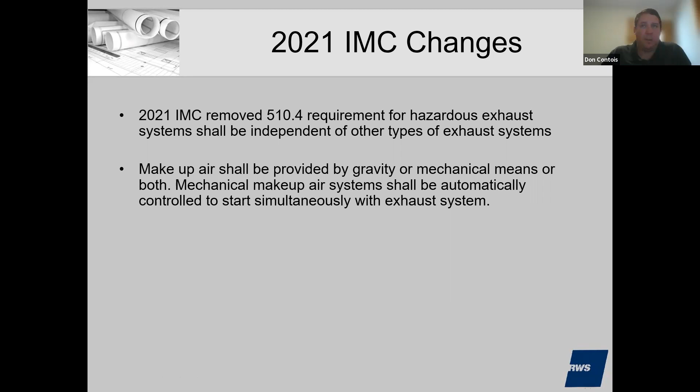Covered quite a bit of stuff, but if there are any other questions, happy to take them.